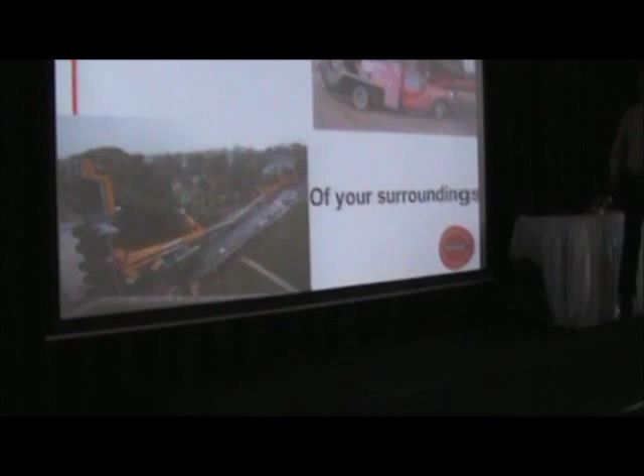Okay, here we go. Can I use - that's hard for me to do because I don't like to stand still. I'm sorry, I had a Pepsi and a half. I'm ready to go sideways.

Okay, we'll try here. Anyways, safety moment. In every presentation we do, we're required by company policy to have a bit of a safety moment. This one is always: be aware of your surroundings. In Canada, in the last month, with mast rigs, whether it's water well, some coring rigs and things like that, we've had 3 strikes with power lines.

Each one of the strikes, when they did the assessment and analysis of the job site, it all came down to one thing only: the people said they didn't see them there. They weren't aware of their surroundings. No one got hurt - one guy got burned bad from an arc, but that's about it. It's one of these things when you're dealing with mast rigs, or even equipment digging a trench - you've got to be aware of what's above you and also below you.

Okay, we've done our safety session, we're good to go now. Okay, for examples of grouting - this is going to kill me to stand in one spot, but here we go. This is just a couple of slides I've pulled out of different presentations I've used across the country, and this one here is examples of poor grouting.

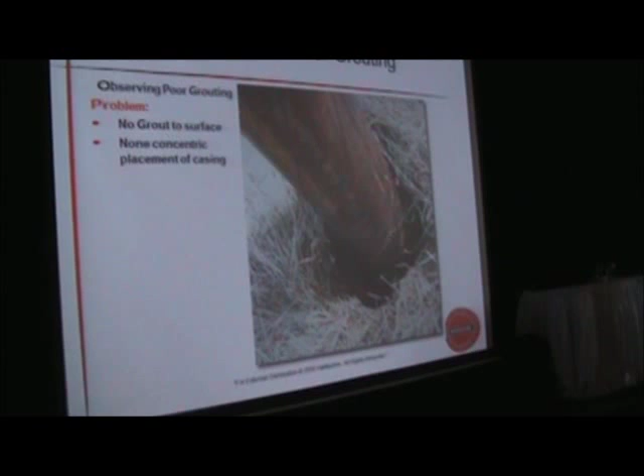The next thing is non-concentric placement of the casing. If you don't have your casing centralized, I don't care how good your pump is, or whether you're pumping cement or bentonite or a combination - you're never going to get a proper seal. If your casing is touching at any point, usually within the top 20 feet, up against the formation somewhere, you're going to have seepage and wind up with contamination into your well.

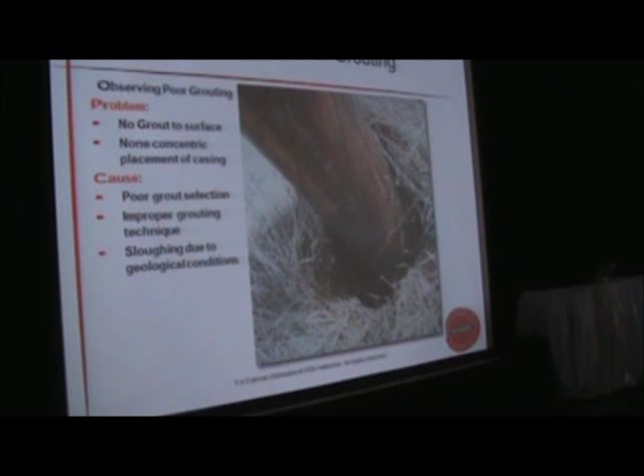The cause of this is poor grout selection, and that's a big part of when this type of situation happens. Improper grouting technique - we're going to cover that a little later on. And sloughing due to geological conditions, putting in the wrong material because of the conditions you're in. We're going to be covering when and where to place certain materials, and the impact - contamination to the aquifer well. Very straightforward.

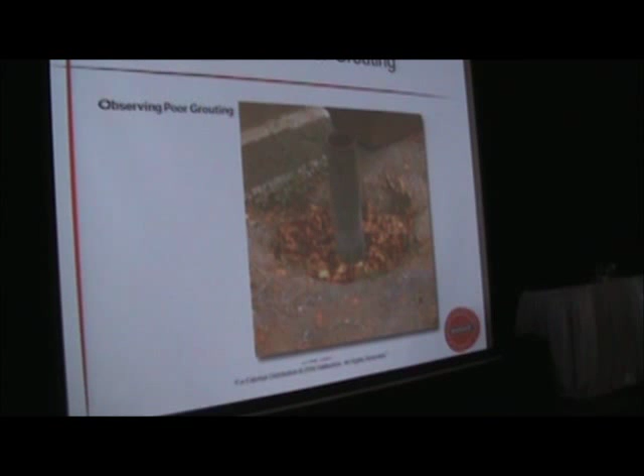Runoff, small animals, insects, so on and so forth - basically you have an issue on your hands for no reason. The next one here is from an older well. The cap was taken off - there was a vermin cap on top, but this was when they were getting ready to do some work on a well, and there was just subsidence around it.

Problem here is poor annular seal. If you get subsidence like that in anything, generically, I don't care what you're grouting with - if you're getting that type of subsidence happening, you didn't have a proper seal when you first put it in. The grout job that you did, for whatever reason, wasn't done properly. Now, when they settle like that, cement settles a bit, that's fine - you gotta top it up. But this happening after a couple of years is due to, at the end of the day, a poor annular seal.

No cap - that one there was put in just to make sure that everyone was staying awake. And then poor grout selection, and improper grouting technique, same deal - you get a lot of pocketing. If you get pocketing in there happening, you will get subsidence happening.

Backfilling - if it was a trench or something, in this case it wasn't a trench, it was actually a grout with tremie line that they did. But if you were digging, say, doing some pitless or something like that, and you didn't backfill properly right around your pitless, you will get subsidence happening. Impact - basically over time what you do is you get a washout and collapse.

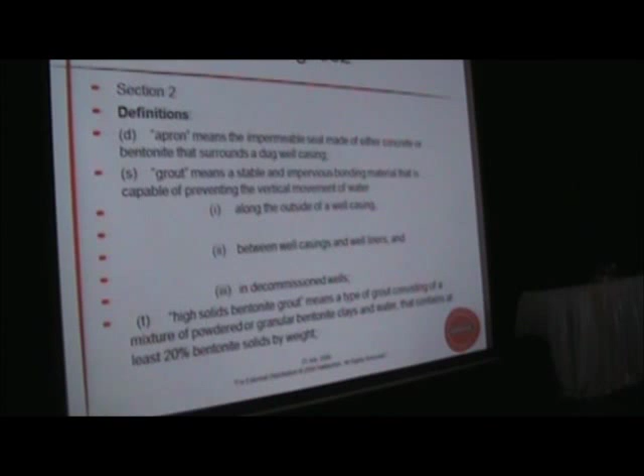Okay, regulation 903, out of the definition section. What I did was pull the pieces that contain the grouting, because that's what we're going to be covering. When you get into dug wells, apron means the impermeable seal made of either concrete or bentonite that surrounds the dug well casing. I'm going to be referring to these, but this is just to get us going.

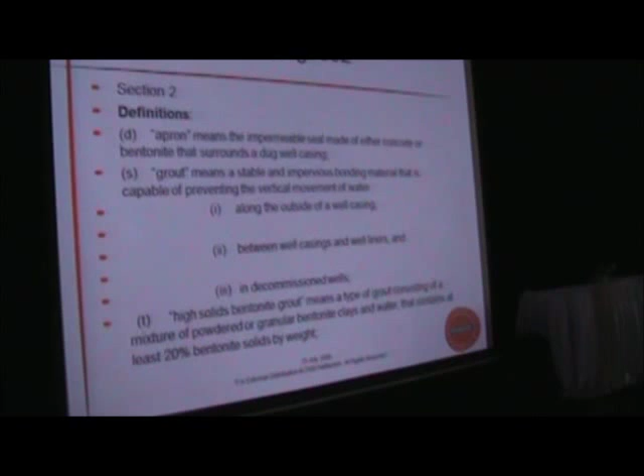Grout, and this is their definition straight out of the regulation - these are the government's words - grout means a stable, impervious bonding material, that's critical, that is capable of preventing vertical movement of water, number one, along the outside of the well casing, between the well casing and well liner, and then when you decommission a well. The last definition that applies on the grouting side, which we're talking about today, is high solid bentonite grout: a type of grout consisting of a mixture of powder or granular bentonite clays - bentonite and clays are the same thing - and water that contains at least 20% bentonite solids by weight.

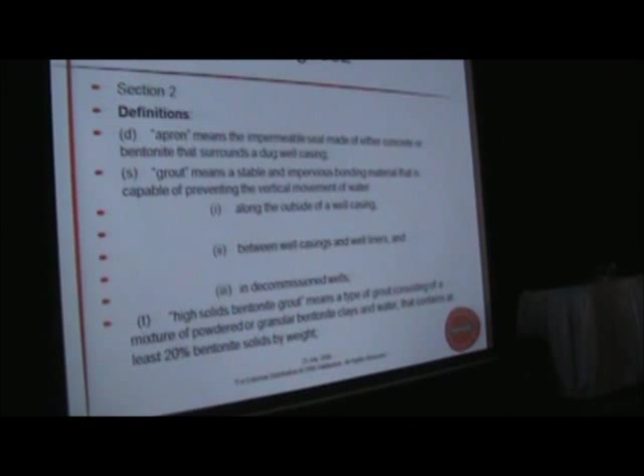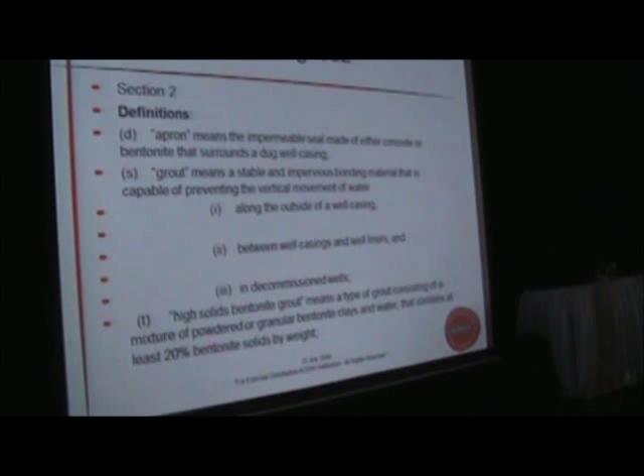The way we check for solids, if someone's coming out for an inspection or there's an issue, is they do density tests by weight, and that's how they figure it out - there's no ifs, ands, or buts. It's a balance we use, or any inspector uses, just a straight mud balance, done by weight. They go by manufacturer spec, and there's a tolerance in there for weight, depending on what product you're using, and that's how they figure out whether you're light or on spec.

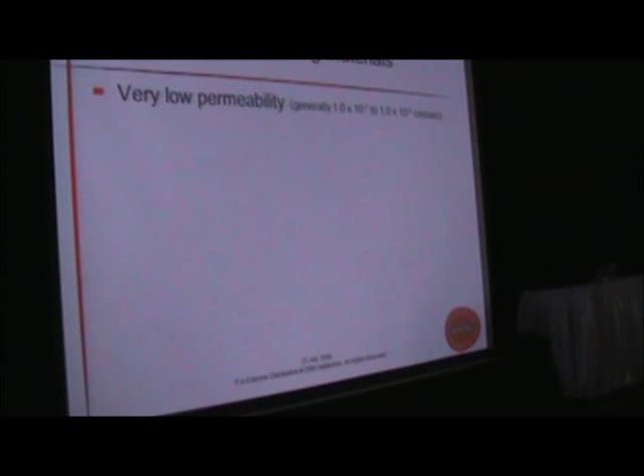Okay, suitable sealing materials have low permeability, generally around 10 to the negative 7 to 10 to the negative 9 centimeters per second. That's the movement or infiltration of outside contaminants inwards towards the casing - that's where your seal is. That's very, very slow - extremely slow, years and years and years to get any movement.

Capable - and this is very critical, this is the part that a lot of people overlook. They just say, well, I got it in the hole, it's going to happen. Capable of bonding with the casing and the borehole, forming a permanent watertight seal. That's it - that's what a true grout is, and I don't care what kind it is or what manufacturer, that is what a grout is anywhere in the world. That is what a grout has to do for you in order to do the job properly.

Uniformly distributed around the casing to facilitate an effective seal.

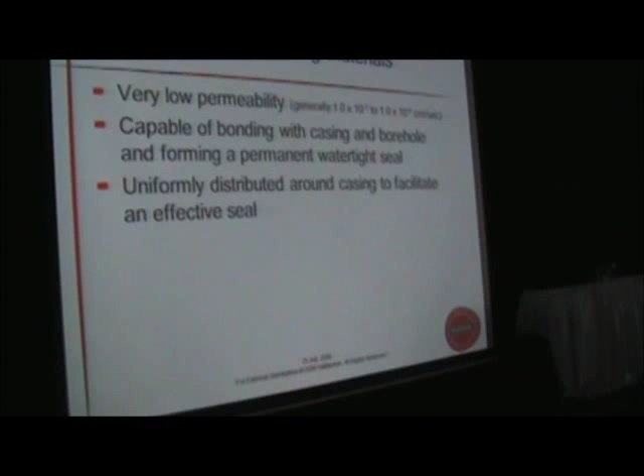Under the regulation here, and this is where I'll repeat some important things: grout is required to be a minimum of 20% solid. So if you're cutting it back with your cement or whatever so you can pump it, you're actually below the regulation spec.

On materials, that 20% is the standard, though there are grouts designed down to 16%. But that would be more of a temporary seal, something you're grouting and planning to clean out later, like for a week or two, before coming back in to do it properly around 16%.

Everything else is 20% or above. Wells that are specifically engineered or designed are anywhere from 30 to 80% solid. Those are specific jobs where you're dealing with contaminants or commingling aquifers that they definitely want kept separated.

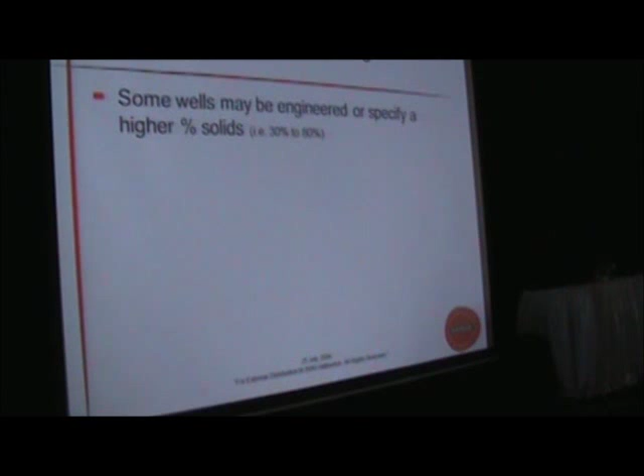That's where you get to the 30 and 80%. These designs are based on the scenario and standard of the particular job, the soil formation, and the degree of permeability. The higher the solids, the slower the ability of the outside zones to migrate.

30% is typically used for a monitoring well or municipal well. Most municipal wells, if it's for a large system, require a minimum of 30% solid. That's still a pumpable grout, but it's a lot heavier - a big difference when you start to pump.

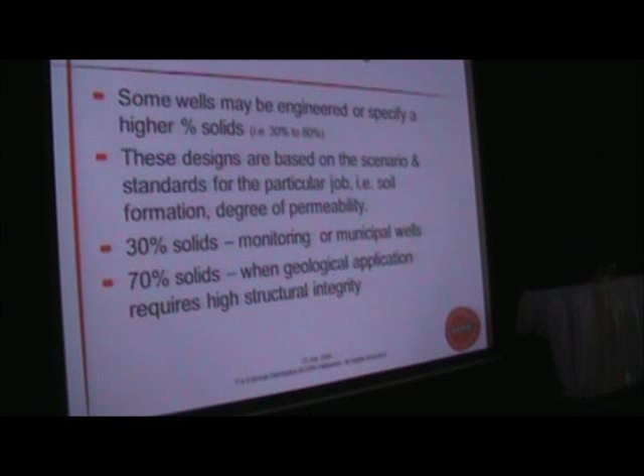70% and up is for geological applications requiring high structural integrity. Bentonite doesn't have structural supporting strength like cement, but it will hold and seal. The higher the solids content, the more structural integrity, or the stronger it's going to be in supporting load.

Now I've divided the presentation into two sections. The first is drilling and construction of drilled wells, and the second part is on dug wells. For the first part, section 21, I'll go through these quickly as an overview, then get into where the grouting comes into play.

Well casing, this is section 21.1, going through it quickly. A well casing must be installed in each drilled well, and it must meet certain requirements. The well casing must be at least 6.1 meters - for old-fashioned people like me, that's around 20 feet - and it must extend at least 152 millimeters above ground.

So you've got to have your stick-up at least 6 inches. There's a minimum annular space of 1 inch outside the well casing, between the well casing and liners of different diameters. They want the 1 inch because with that you can at least get in there and grout - it'll be tight, but you can still get a tremie line down there.

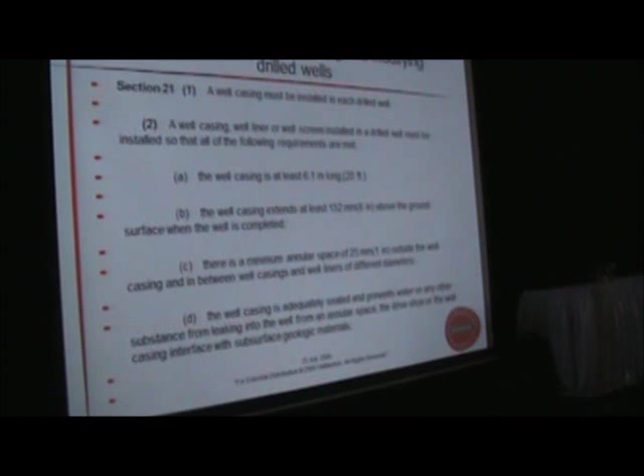A well casing must be adequately sealed and prevent water or any other substance from leaking into the well from an annular space, the drive shoe, or the well casing interface with subsurface geological material.

For steel casing, a drive shoe is to be attached to the bottom. That's one thing - this is one of the few provinces that stipulates drive shoes have to be on the bottom of the steel casing, and that was something I found interesting about your regulation.

Except when using remediation for a well, under clause G, a seal of high solids bentonite grout or other grout must extend upwards in the annular space to at least 1 meter above the base of the casing and seal the annular space. That's what you have to do.

For a well liner installed to repair or modify an existing well for water contamination, a seal of high solids bentonite or other grout must extend upwards in the annular space from the base of the well liner to as near to the surface as possible.

One thing when using bentonite - if you want it to remain active and do its job, it cannot be exposed to sunlight for a long period. It dries out, like a cornfield. When it dries right out and then it rains, it heals itself up. That's what bentonite does - it'll start to crack, and then when the moisture comes back in, it seals again.

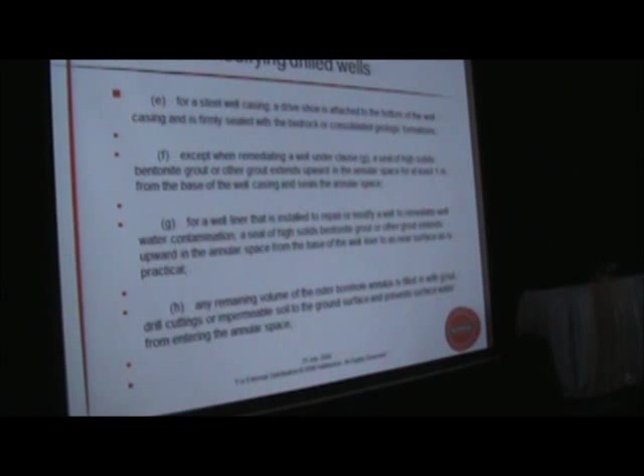So if you're ever going to run bentonite to surface, you always want to put 3 to 4 inches of soil over top of that bentonite. That will be enough of a seal to keep it from drying out, splitting, and getting any micro fractures in there, okay?

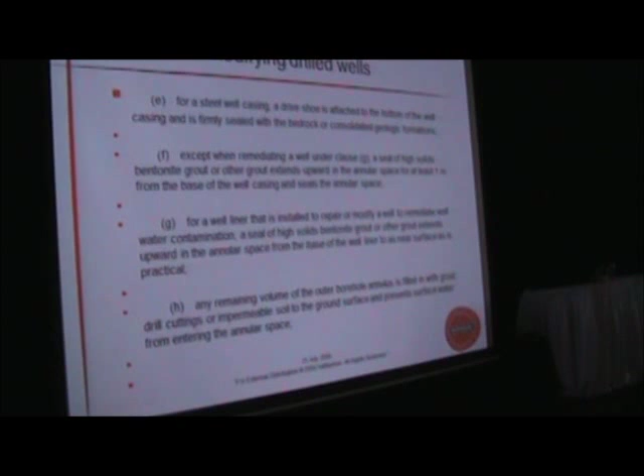Any remaining volume of the outer borehole annulus is filled in with grout, drill cuttings, or impermeable soil to the ground surface to prevent surface water from entering the annular space. In other words, mound it up on top. You're allowed to mound it using drill cuttings or soil or whatever over top of your grout.

A well casing is welded or otherwise connected to the well screen used. Any natural or manufactured filter pack material used in conjunction with the well screen developed after installation must be material suitable for potable water applications.

Question to you guys up there: how thick of a filter pack can you put on the outside of a screen that you can clean at any time? How thick? 7, 8 foot? What is the maximum that you can actually surge and swab and clean a filter pack?

This isn't a trick question. The answer is anything over 7 inches for a filter pack - if you're going to be cleaning, have to go back into the well years later because it's starting to plug off, you want to surge and swab. Once you're over the 7-inch spacing on the outside of that screen, into the formation, you will not be able to get your chemicals past the 7-inch mark. At 7.5 inches, I don't care how much horsepower you put down there, unless you destroy the screen and blow out the filter pack, you won't be able to clean any deeper than 7 inches.

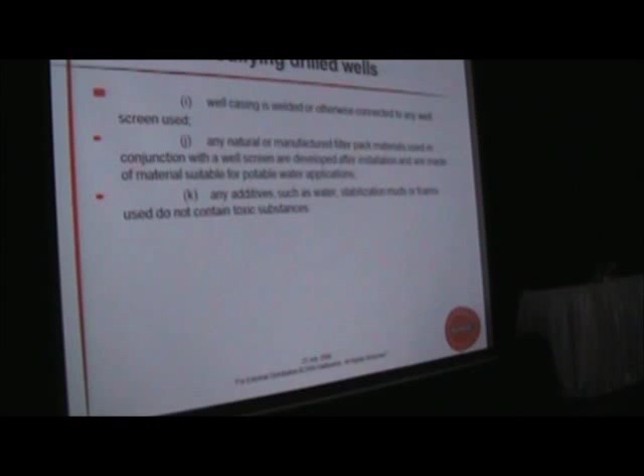They've tried it - used horsepower, used air and everything else - to get the chemicals back if you have an acid situation, some slime happening down there, or contaminants building up over time. A 7-inch filter pack is about the maximum you can thoroughly clean and do a proper job of it all.

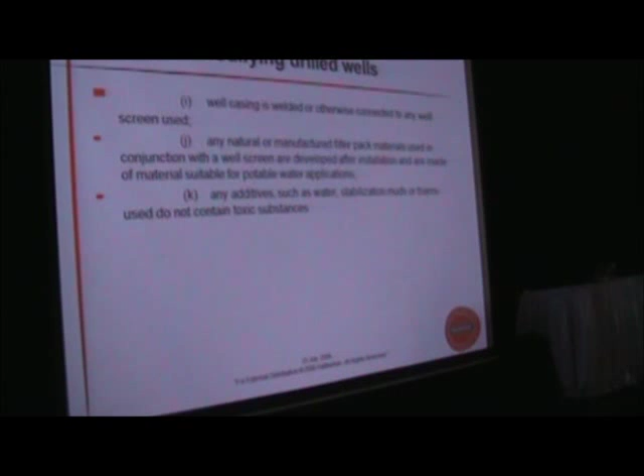Any additives such as water stabilization muds or foam used must not contain a toxic substance. I'm going to cover the environmental side of this at the very end, but right now, if you're in the water well industry, anything you use that's part of the reg has to be NSF. I'm going to explain that with a couple slides on NSF, what it's all about, so everyone understands what to say and what not to say - in a lot of cases people misinterpret what NSF stands for.

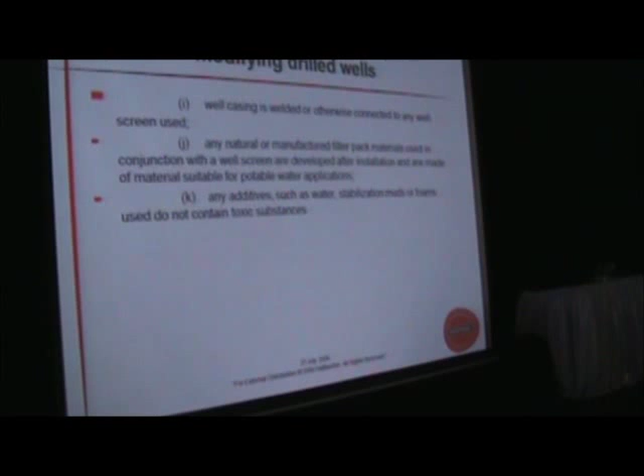For a drilled well, the main thing they discuss is bentonites, and I'm just going to cover bentonites here. Cements I'm going to cover on the side when we do the dug wells.

Advantages and disadvantages of bentonite - this is 20% slurry minimum, and it's a minimum I'm putting in there. It expands up to 8 times its dry volume when exposed to water, with expansion force into the open annulus spaces in an annulus.

Basically, the difference between bentonite and cement in how they set up is this: when bentonite sets up, it absorbs water - it's a sponge, it's clay soaking up water, that's why it swells up. When cement sets, cement displaces water. That's the difference between the two products. That's why you can get a little bit of shrinking or subsidence when putting in cement - whether it's out of a bag or from a plant, cement displaces water, that's how it sets. Bentonite absorbs water. Two different reactions that happen down the hole.

Bentonites have a faster setting time than cement - that's true to a point, because you can set up cement very quickly, within 3 to 4 minutes if you want, using chemicals. It's pretty easy to do, I've done it, and I wouldn't do it again, because once you start playing with that, cement is all about chemistry in its formulations - that's when you're getting into doing anything with cement.

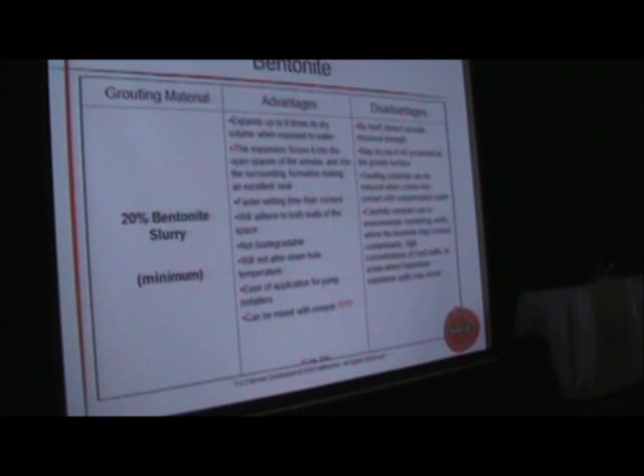If you want to put a cement cap on, cement is calcium-based, bentonite is sodium-based, they don't get along that well. So what you have to do is put a layer of sand. If you're going to cap a well with cement after you've grouted it up, you should put about 1 inch of sand between the cement and the bentonite. The cement will move down and migrate, the bentonite will come up, but as long as the two surfaces aren't directly in contact, you'll have a constant seal. They'll bond, the cement with the sand and the bentonite with the sand, acting as a buffer between the two, and you'll still get a proper seal.

A big thing with bentonite, and this shouldn't apply to any water well unless you're decommissioning because the well is contaminated, is that you have to be conscious of contaminants in the water, like with decommissioning a bad well. The type of water or contaminants in the formations can, in some places, retard the bentonite from setting up.

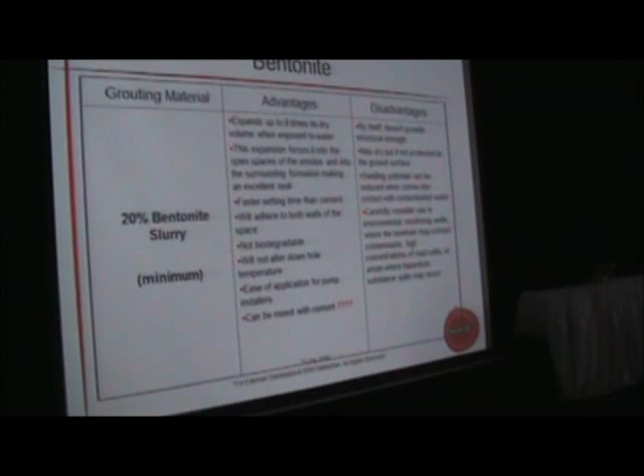Carefully, this goes into the same thing: if you're installing a well in springtime on a busy roadway where they're spraying calcium chloride and spreading a lot of salt, I'll be honest with you, the top portion is not the spot you want to have bentonite, because calcium chloride and high chloride salts do not get along with bentonite. They degrade them, break them down.

They come in several different forms: powder, granular, chips, pellets. There are two types of pumpable grouts, and a dispersed bentonite grout is one of those grouts that have various additives put in them. They grind the bentonite up to a certain size, and as it's going down the conveyor into the dryer to dry it to the right percent moisture, they spray retarders on it to slow its ability to hydrate. These are called one-step grouts, and the ones we have are Quik-Grout and AquaGuard. You just take the bag and put it in the water.

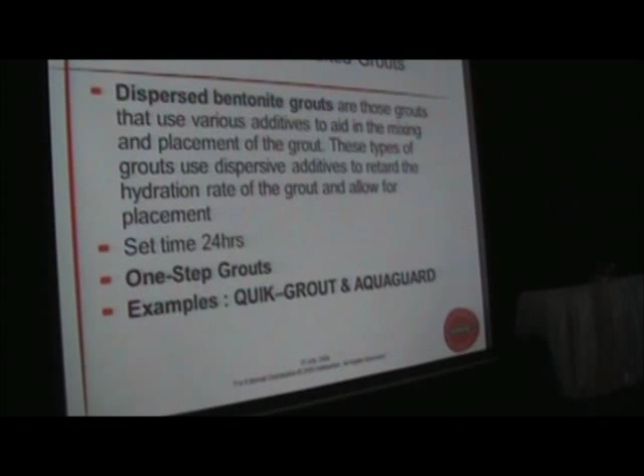There's retarders sprayed and dried onto each pellet or granular, so when it hits the water, it has to be washed off by the paddles as it's moving around in your mixer, and then when it starts to wash off, it starts to hydrate. For it to truly set up, the setting time for a 100% set is around 24 hours. The working time, where it starts to go into its set stage, is anywhere from 5 to 7 minutes from when it's introduced to the water. So when you're grouting, all grouts are about 7 to 9 minutes, depending on their formulation's setters, but the 24 hours is for a true set, where it's good to go, and that's the end of the ballgame.

Inhibited grouts or dispersed grouts - this is a two-stage system. You'll have your water, treat your water, then put in a polymer base, something like a liquid polymer, as your inhibitor. You're actually doing it yourself mechanically. Then after that, you put in raw bentonite, unbeneficiated, meaning absolutely zero additives. It's ground to a certain size, typically 80 mesh, and you pour it in there next. When the two get mixed around, the polymers stick to the bentonite, slowing its hydration rate, and then you pump her down the hole.

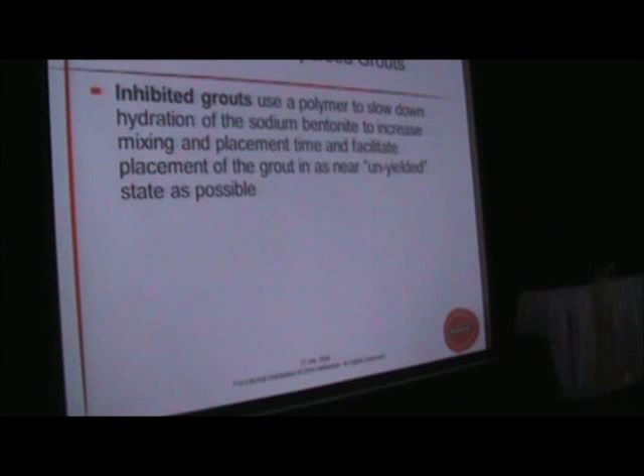That one there, the set time, because you're mechanically doing it, you're actually washing, you're installing the polymer onto it in the process. It doesn't get a long time to bond with the bentonites, so they set up a lot quicker. These ones still have a working time of about 7 to 9, 8, 9 minutes, around there, same as a one-step grout. The big thing is that their set times are quicker.

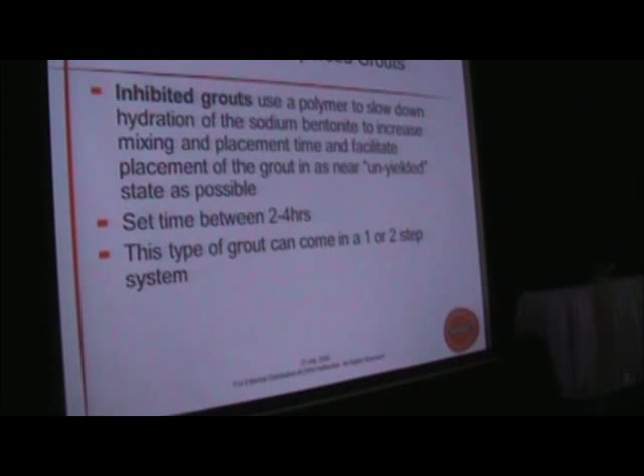What helps suspend your sand when you're doing a geothermal grout? Okay, when you're doing any type of grout for geothermal, when you put your bentonite in there, the bentonite is only a carrier. The sands are what are there for the conductivity. And when the sand is introduced, the bentonite's job is just there to do the suspension. And it has a bit of a retarder put on there. So what it's going to do, once the bentonite is hydrated or whatever, is it starts to lock itself into formation, and that's how it pulls all the sand up.

So it has a retarder on your other ones? Oh yes, it's always something you want. If you're going to use a grout that is designed for geothermal, you're going to be adding solids, sand, your silica sand. If you're not going to be adding any silica sand to something for a geothermal system, you want to use just a standard grout.

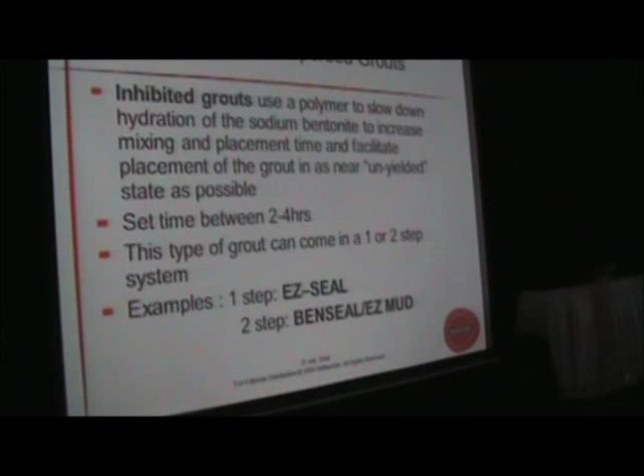And that's your 3 choices out there for any type of grouting. Please do not use a geothermal grout for grouting water wells. Remember, you don't have your 20% solids when you're doing that, because it's very light grout. It's a suspender.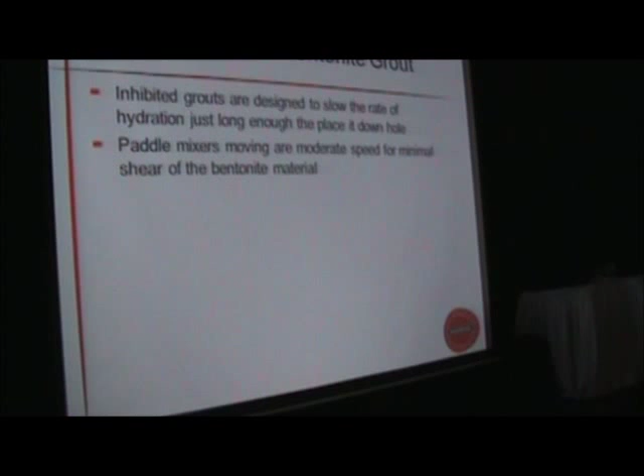Working with bentonite grouts, inhibited grouts are designed to slow the rate of hydration, just long enough to place down hole. Paddle mixers, guys, you've got to have paddle mixers when you're doing these. A shovel will work, I guess, if you want to do it that way, but you can't use any other pump to mix other than paddle mixers. The more abrasive the pump, the faster your grout is going to start setting up in your tank. You cut your work time down.

Best way to determine your percent solids or density with these types of grouts is to accurately measure the amount of water for each batch. That's it. That's the 101. If it says 24 gallons, US gallons or whatever, or X number of liters, that's what each batch has to be. It can't be, well, we'll put this, yeah, that's about right. You mark it on your tank or whatever you're mixing in, and that's your fill line every time.

Simple as that. You do it once, mark it, you're good every time you're going to grout. But if you're doing the guess game, you're going to wind up plugging tremmy lines, you're going to be inconsistent in your grout, and you can get sloughing happening, sediment. Because if you put a heavy batch, light batch, or whatever, it's not consistent, your grout is not going to set up all the same, and you're going to wind up having subsidence happen.

Okay, take time to calculate the correct volume, and we'll cover that really quick down the road here. Calculating correct volumes - plug and pellets, approximately 70% solids. These are one of the easiest things. Typical bag, a 50-pound bag, is 0.7 cubic feet.

When you're dealing with pellets, it's a finely ground bentonite, and they use these in environmental quite a bit. All it is, is a 200 mesh ground through, and they're put through plug screens, basically through a press, and that's how a plug is made. Then they're cut to length. Uncoated is just the ground up material put through the screen with a binder to hold it together.

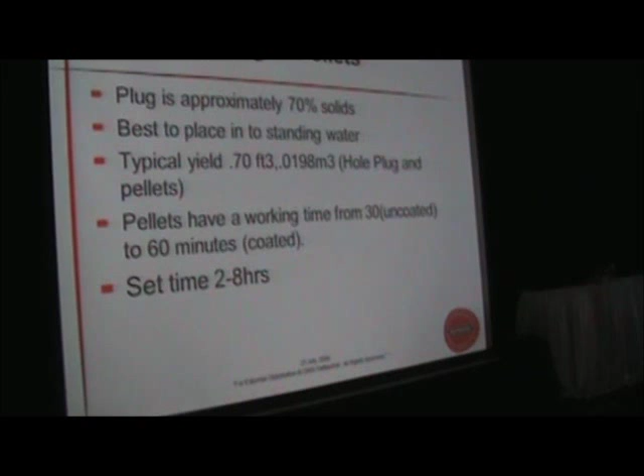On a drilled well, it's bentonite. That's the only thing in that whole section, section 21 I believe it is, where it says bentonite, bentonite, bentonite. It does not mention cement whatsoever. The regulation is right up here. It's what I was told with regulations, because I deal with each province - it's all up to the interpretation of the user.

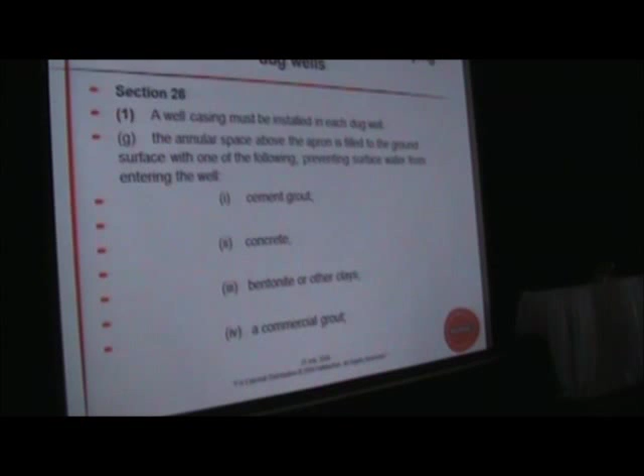The annular space above the apron is filled to the ground surface with one of the following to prevent surface water from entering: cement grout, concrete, bentonite or other clays, or commercial grout. Simple as that, that's what it is. On the other side, piping connection excavations are filled with one of the following, and they list the same thing: cement grout, concrete, bentonite or other clays, and commercial grout.

Any additives used, such as water stabilization muds or foams, do not contain any toxic substance. This is where, in the definition section, this comes in. It's critical that if you're using anything in the water well industry - and at the very last part I cover this - you gotta make sure, and I know everyone does here, but I can't specify enough, that it falls in compliance on the environmental side. I've had a couple issues in the far north where they ran out of stuff and they decided to improvise.

And the wells they were doing, we had to cement them off. They were classified as contaminant before we even got them online, just because of the products they use. So I can't say enough, if it's not within the realm of drilling products out there and certified products, don't use it.

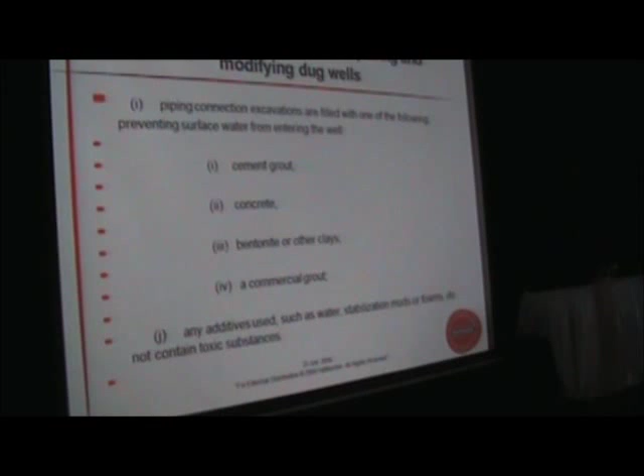Okay, on this side we talked about bentonites, and on this side here we're going to cover the cement side of it. The cement has a greater density than bentonite. It is easier to place. Cement will flow anywhere for you. If you want to modify it by adding something into it, whatever you can. It has structural strength, and it resists many common contaminants.

The one thing with cement is you can fool with set times or whatever, but I don't care what additives and how fast you have your cement setting, cements should be allowed to set a minimum of 12 hours before you do any work on or around it. Because at 12 hours, a cement is not fully cured, but it has enough structural integrity and bonding already happening chemically that it will hold together. You're not going to create any damage. The longer you leave it set, the better off you are.

When setting, heat is generated, this is critical, I actually had several disasters in this area. Heat, which expands metal casings, may cause seepage over time. The faster a cement sets, the more heat it generates. And that is why if you're doing a lot of stuff, especially around PVC, and it's in the next couple slides, what you want to do is put a retarder in the cement.

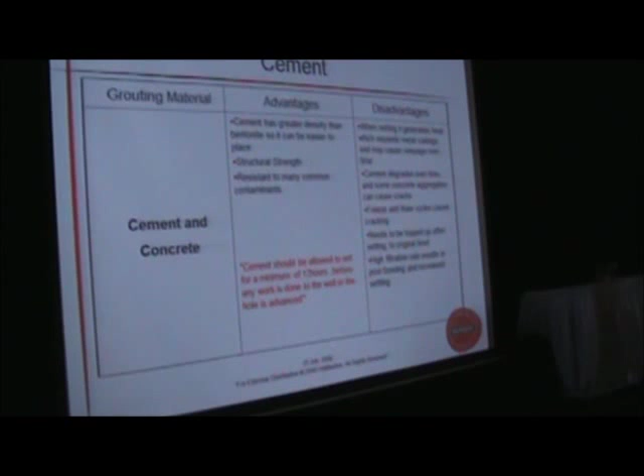Cement degrades over time, and some concrete aggregates that they add in there can cause cracking. Freezing and thaw cycles with cement, typically towards the surface, if they get any type of a crack in them, you can have some issues. Needs to be topped up. And remember when I said cement sets, cement shrinks. It doesn't really shrink, sorry, it displaces water. When it displaces water, it's losing volume. That is why you have to go back and usually top them up.

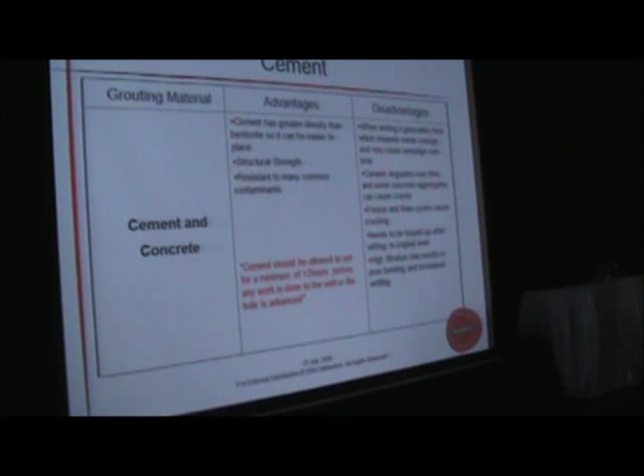High filtration rate results in poor bonding and increases in settling. Filtration rate is the speed at which the water leaves the cement when it's in the set stage. You can play with that. It's not too hard to play with, but that's one of those things you have to be aware of.

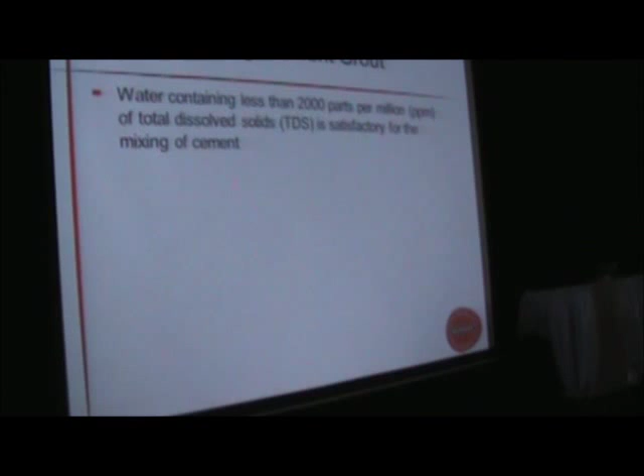Mixing cement, one thing is you got less than 2,000 ppm of total dissolved solids. In other words, if the water's pretty reasonable, you can get away with it. One thing that will offset cement is if there's any type of residue from a hydrocarbon, even a trace hydrocarbon around, some grease or something like that gets in there, that will mess up the batch of cement. High pH, if you're pulling from a treated system or whatever and it's got high pH, what it'll do is it speeds up the setting time of cement.

It's very rare, but sometimes at some of these municipal places that people pull off of, filling up water trucks or whatever, then out to a job site—if it's a brand new subdivision or house being built in the middle of nowhere with no water around, they take their own water in or fill up on the way. Sometimes these newer systems out there are treating the water a bit and the pH is up, and guys have issues setting up the cement when they use it.

No cement is any good in any situation if you have lumps in it, because the lumps are dry inside. If everything sets up with a big wad in there, inside that lump is air—there's pocketing, and then you're going to have issues down the road.

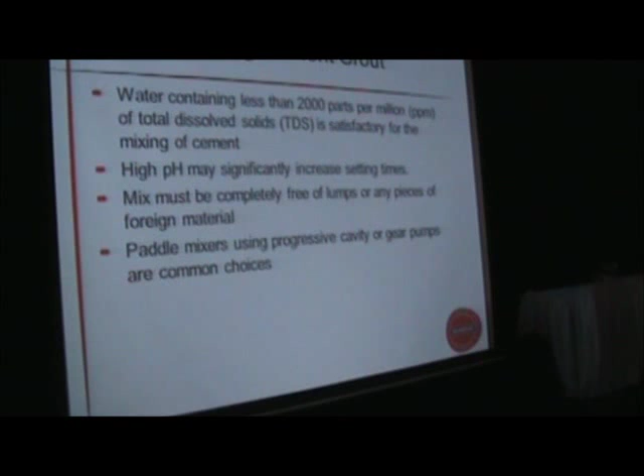Paddle mixers using progressive cavity pumps or gear pumps are most common for placement. Piston or diaphragm pumps can actually be used for mixing cement—you can get away with that. A progressive cavity or gear pump, no. Those have wear, the stators get worn very quickly when you're pumping cement, and they have limited ability to develop enough pressure to move long distances, whereas a piston or diaphragm sucks into the chamber, pushes out, and away she goes.

Microannulus—if you're mudding up or even using heavy foams and you're going to cement right afterwards, try to make sure you get that out, blow the hole or flush it before you start the grout. Because if the bentonite gets in there along the formation, the cement will not move through a filter cake, and over time that filter cake or bentonite seal—the wall you created when you drilled that hole—will start to break down and you create your own microannulus.

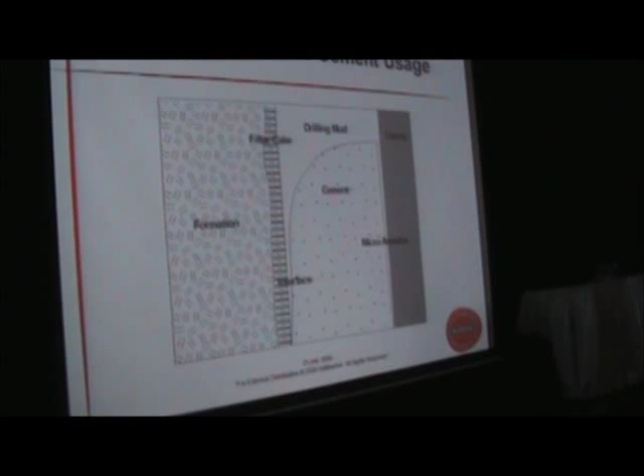Also, you've got to be conscious of the casings. Steel—added heat expands the casing, dissipated heat causes the casing to contract. Over time, when you start your grouting, as long as things set and everything happens in a very slow cycle, you're not going to have issues with the bonding. But if it flash sets, or you're playing with the setters, that's when you're going to wind up having real issues with microannulus.

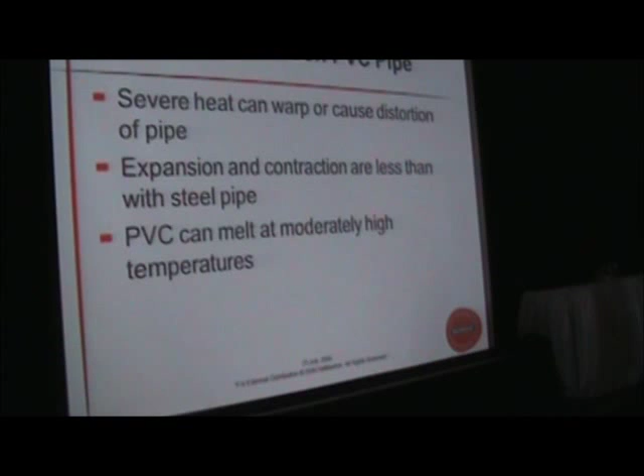PVC—warp distorts the pipe. I personally will not go on the job anymore; I've learned my lesson that if you're using PVC pipe and they want cement, I don't want any part of it. A lot of the time guys are mixing their own cement, and even when it's the right number of batches, I've almost always had issues with the cement expanding—getting some warping or issues with the seals where they join together if you're putting PVC in sections.

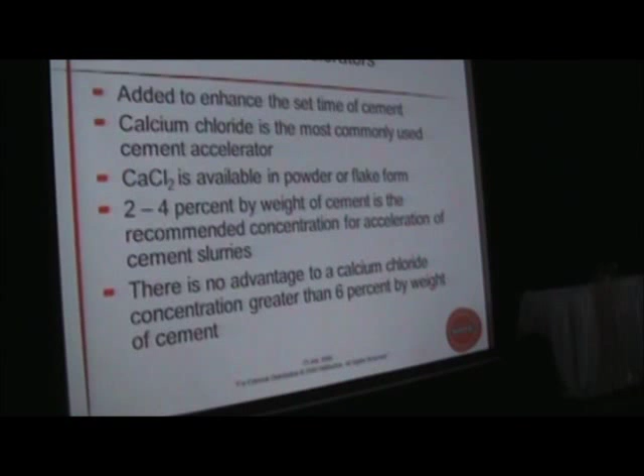Cement accelerators all do is speed up the set time of cement. Calcium chloride is the most common, in powder or flake form. 2 to 4% by weight of cement is the recommended concentration for an accelerated cement slurry. If you're going to add calcium chloride, it's 2 to 4% by weight—there's no advantage to adding more. Guys figure they'll put a little extra, up to 6%. Once you've exceeded 6%, you might as well just call it a day and start another well, because the cement will either set up on you before it comes down the chute or off the end of the wheelbarrow, or you'll get so much heating along your casing that you're going to have a microannulus. Either way, you're painting yourself into a corner.

Standard, if you're using a sack of cement, it's 0.8 to 1.6 kg, or about 1.8 to 3.5 pounds per sack of cement—that's an 88-pound sack of cement. Accelerators with cement at low temperatures are very unpredictable, because cement is a chemical reaction. If the temperature is really cold out and you use cement with an accelerator, the combination of the two just turns your cement sideways—you're not going to have a proper set, or nine times out of ten, you're not going to have proper mixing.

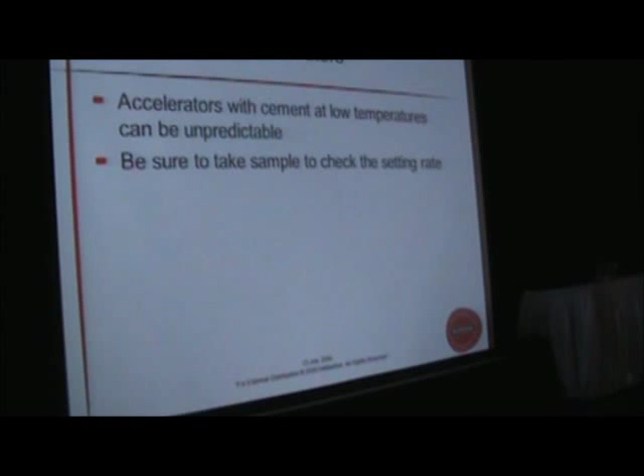I always tell people, if you're doing the cement side of it, especially with any volumes, when you pour your first batch, take a sample and set it aside, noting the time you started your cement. Then you'll know very quickly how well it's setting up.

If you use too much calcium chloride, once you get around 6% concentration, it can cause corrosion problems. You want to stay between 2% and 4% calcium chloride by weight in cement.

It's been proven over the years that if there's any marks, scoring, or scratches on the steel where the outside coating, we'll call it paint, is removed and steel is exposed, you'll get corrosion.

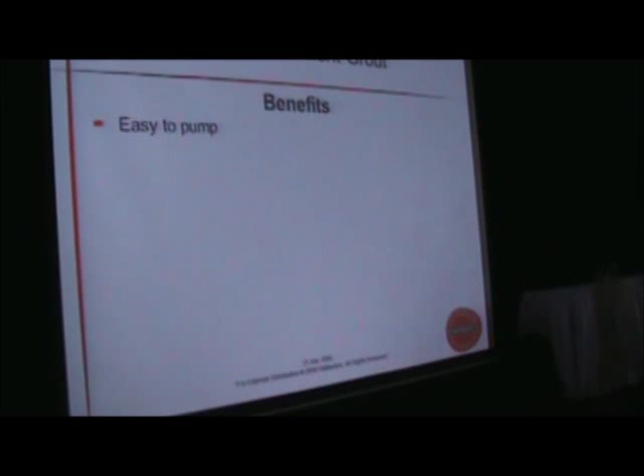The big thing is just follow your manufacturer's spec. Now, bentonite cement, this is my pet peeve, but I've got to put it in to be fair to the whole deal. Bentonite and cement grouts are easy to pump and easy to clean up afterwards, they're Cadillac to clean up. Bentonite can be used in concentrations up to 5% by weight.

Anyone that's put bentonite in with their cement thinking it's going to do something, I'll explain what it doesn't do. Once you've exceeded 5% by weight, you basically have garbage down the hole, because cement is a calcium based material and bentonite is a sodium base. They don't get along.

The only reason bentonite was ever introduced to cement, and I know you guys do deep wells around here, but I don't know anyone pumping cement 15, 20,000 feet. When you add bentonite to cement, it acts as a lubricant. That's from the oil patch, that's where that comes from.

For what you're doing in the water well industry, yes, you can do it. But unless you're pumping anything over about 12,000 feet, there's no reason in this world that you need to be adding any bentonite. That comes from the oil field, it was adopted from the oil field, and realistically it doesn't do you any good.

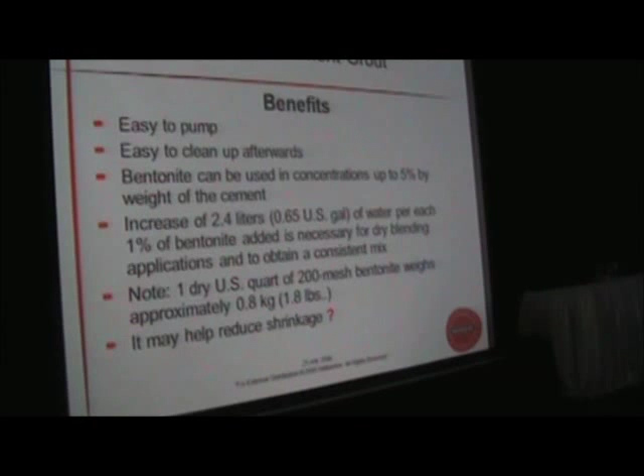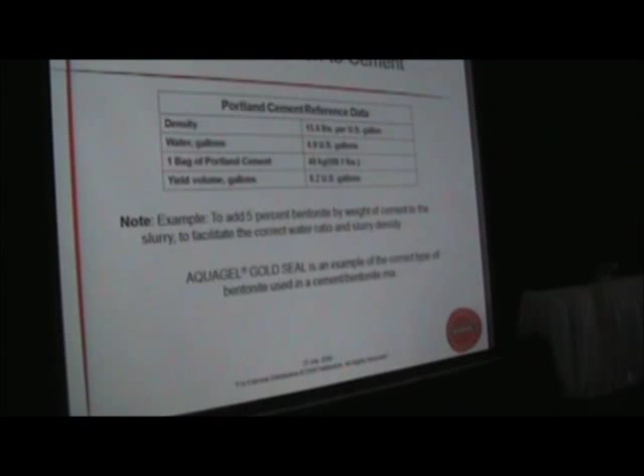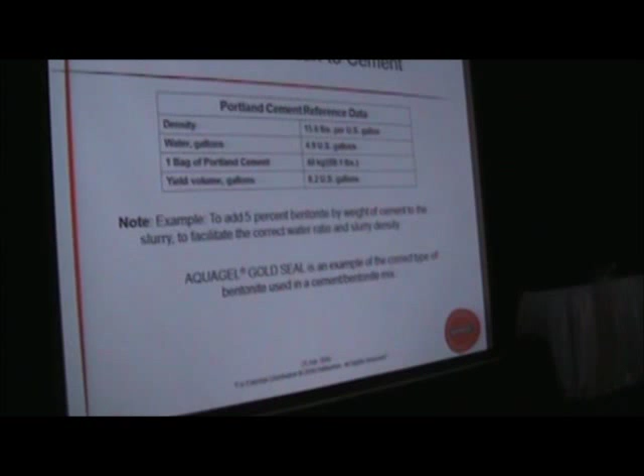The only thing I want to point out is if you're going to be adding a bentonite to cement, please remember this: you have to use, and this is a big word but it's very simple, an unbeneficiated bentonite. That means a bentonite with zero additives. It's the bentonite from the mine, dry, ground, sized, and bagged. There's absolutely nothing, no additives to it. Ours is called Gold Seal, but there are other manufacturers that have intended to use something with no additives.

Remember, bentonites have additives put to them. Mostly they're polymers or extenders put in there to change their structure or the way they behave when they hit the water. Those polymers tend to turn bentonites wonky, cements wonky. They can turn them into pudding if there's too much polymer in the actual bentonite you're adding to it.

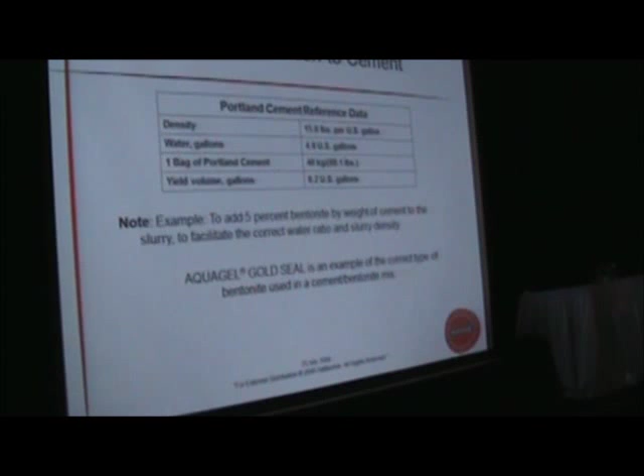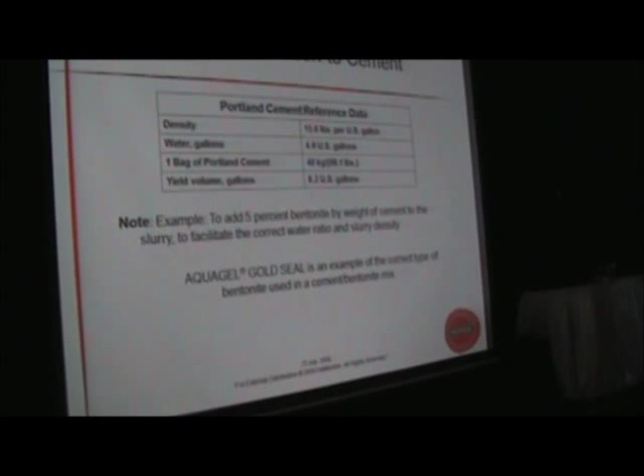If you add weights, if you're not measuring how much bentonite you're putting in and just throwing it in your bucket with your cement, which I see quite often, what you'll wind up doing is that certain types of bentonites, because of the polymer coating on there, will turn the cement into more like a bubble gum down below. They'll set on the surface where they can get rid of the water, but anything in a contained spot, they tend to set like a bubble gum. They really don't go into a set. It takes about 2 to 3 weeks to get them set up after that.

This gives you a rough idea. You've got 0.65 US gallons fresh water for every percent bentonite added. If you want 5% bentonite, it'd be 5 times 0.65, so you'd have to add...

3 and a quarter US gallons. The reason everything, just so this was brought up, asked earlier, why on the bags we have the metric, and why is everything in US? Because that's where it's manufactured. That's where the best deposits in the world, which are in Wyoming, are, and they always base everything, oil patch, doesn't matter where you go in the world, on US gallons per barrel. That's why that is.

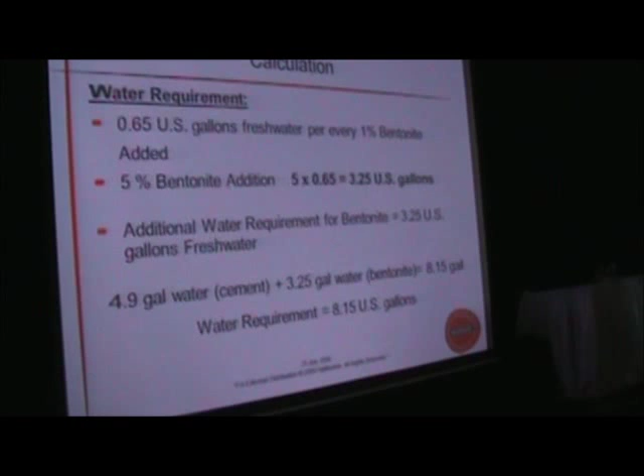What it is, you've got your bentonite. The additional water required for bentonite, for 5% bentonite by weight, is 3 and a quarter gallons. You'd have your cement at 4.9. You add those two together, you need a total of 8.15 US gallons of water for cement at 5%, or cement with 5% bentonite added to it. That's on your slide, so you don't have to memorize it, but it just gives you an idea of what you have to add in order to make this thing work.

Hole volumes, pretty straightforward in this situation. All it is, you take the diameter of your hole and you square it. So if it's a 10-inch hole, it's 10 by 10. 10 times 10 is 100. I always round up in the field, if you've got your calculator handy you can do it. So it's 10 times 10 is 100, divided by 25 is 4. So it's 4 gallons per foot of material or fluids or whatever to fill that extra space.

If you have a pipe or a casing in there, all you do is take your casing size, multiply the two numbers, subtract them out, and that'll give you your volume of what you're going to need for your unit.

Okay, we'll go through this. That's another way of calculating it out. Just take your diameter squared, the easiest way. These slides are in your presentation, or in the handout, but what it is, is just a conversion.

1 cubic meter is 1,000 liters, 1 cubic yard is 27 cubic feet. If you're going from a liquid, you've done your hole volume calculation, okay, and it's a 10-inch hole, you want to fill it up with dry material. What you do is divide, you have 4 gallons, right? Well, 1 cubic foot is 7.48 gallons. It's pretty easy to do your math on these things, to figure out how much dry material you're going to need.

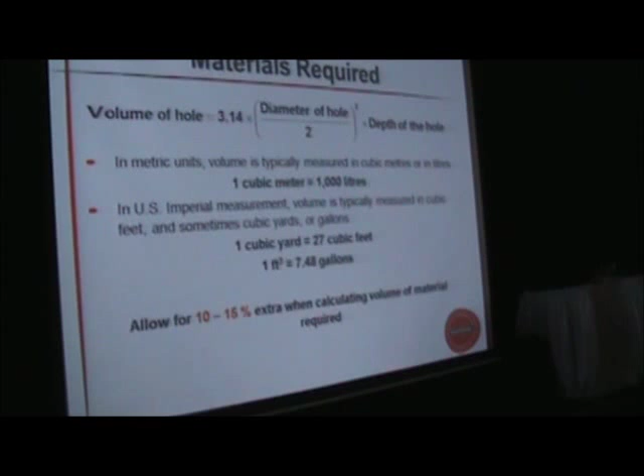Okay, this slide's pretty well redundant, but it gives you an idea how everything calculates out. On the back of manufacturer's bags, or they have these all over the place, if you want to figure out hole volumes and things like that, there's always a chart.

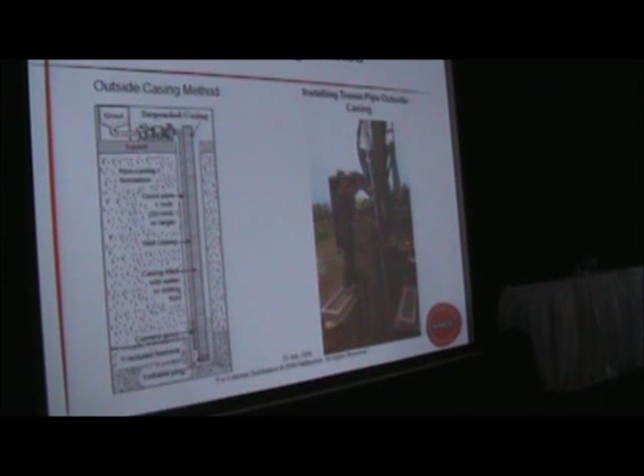And the annulus has to be done, where you run your tremie line down the outside of the casing, and you wind up, because they say you've got to seat the shoe into the formation. So that's your seal, a competent seal, and then what you do is grout from the bottom up.

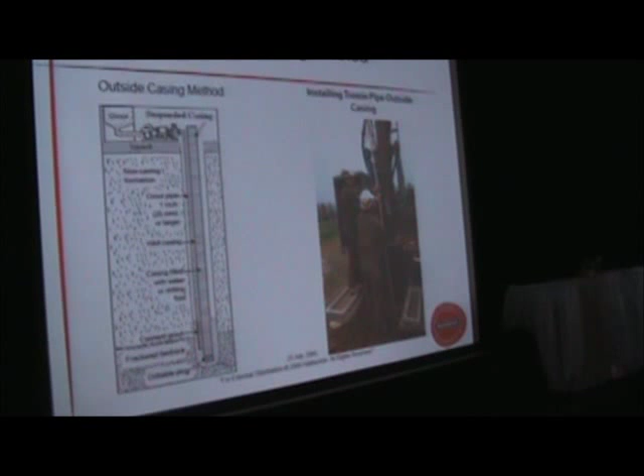Always remember, if you're doing a pumpable grout or even cement, if you're tremieing and doing an outside grout job, try to leave your tremie line buried at least 5 to 10 feet. Cement, I leave it 5, grout I'll leave it 10 feet. But what it is, you've got to purge the hole. So any garbage upside on the formation or anything in that hole, you want to make sure you lift and bring to surface. That is critical. Cement or bentonite, it doesn't matter, you've got to bury that tremie line.

Keep that tremie buried. If you yard her up and shove her back down, especially with bentonite, if you're running a heavy bentonite or having issues with it setting up quick on you, what you'll get is pocketing of air. When you shove it back down, you'll have air entrapment, and if it's midway in there, you'll never get it out. You'll never purge the hole enough or get enough rolling in the bentonite to get all the air pockets out.

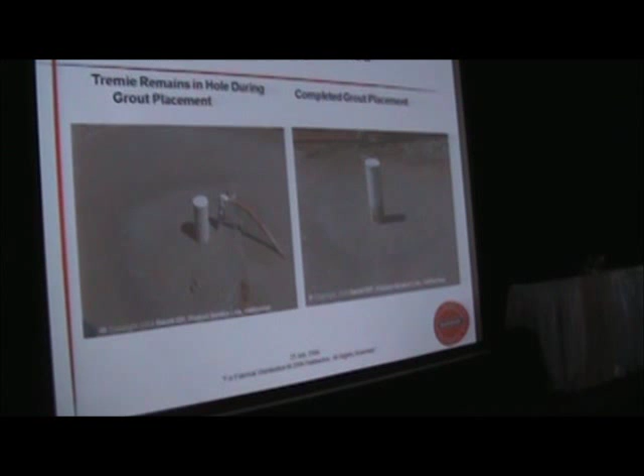This is what you want to see: whatever's in your hopper, whether it's cement or bentonite, has to be what you see coming to surface. When you see it watery, it just drives me sideways, I could walk on water when I see it. Is everything going good on the grouting? Everything Cadillac? The first time they see some dirty gray water come to surface, shut her down. We filled the hole. You've got to purge it right to the top, because if you don't, that's when you're going to have subsidence happening, and you actually haven't done a proper grout job at that point. It should be the same consistency that's in your tank, and away you go.

Okay, hole plug. They do mention using some plug in there, and this is a way you can do it. You have to be patient when you're using hole plug, because if you're not careful, you'll get bridging. I don't care, if you're in a hurry, don't even bother grabbing the hole plug. Even when you're using pellets, which are smaller, they will sink. They're really good for long distances.

Do not start doing this type of dry installation, dry materials like plug or pellets, in any borehole to seal it up if you haven't got time to do it. Because if you get in a hurry, you're going to wind up bridging off, and once you bridge off, you're done. It's a bad day.

Anyways, the best way, and guys are starting to catch on to this out west. It took a while, but they really were starting to push plug, they needed higher percent solids for a lot of the work they were doing in some water wells. So what they did is they spec'd in a hole plug, that type of material, 3/4 or 3/8, for contractors.

The guys just put their barrel up like that, hooked their screen on with tabs, just ran it down there, nice and steady. Think of hole plug like gravel, but when the bags get handled in the back of the truck, they rub together and start to break down, or powder rubs off them. That's the stuff you don't want going down the hole, because when it hits the water, it lays off a layer, call it water scum, and the pellets or hole plug won't break through. That's what causes bridging, unless you dump a whole bag in 10 seconds, then you cause your own problems. But the majority of bridging is caused by the powders.

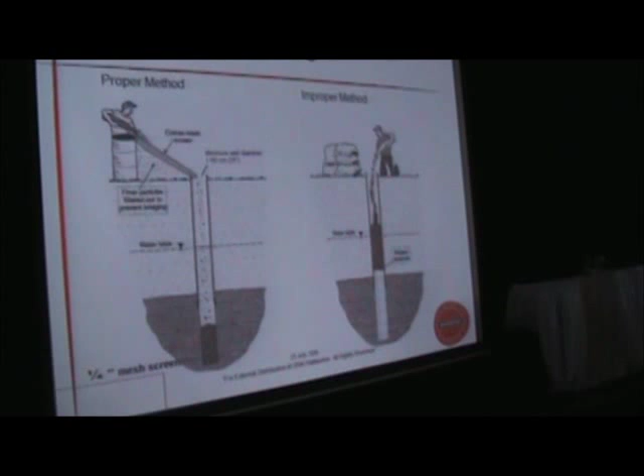Testing water: the big thing is when you're using bentonites or cement. For bentonites, you need a pH of around 8.5 to 9. Add soda ash - pretty simple, a one hit wonder, treats it out. As soon as it hits it, the pH comes up. On the other side, you've got to take out the hardness. When you add soda ash, think of it as a teeter-totter. You've got high calcium or hardness in the water and low pH. When you add the soda ash, it precipitates out the calcium, attaches onto it, drops it out of the system, makes it inactive, and brings up the pH. It's like a teeter-totter, that's how it works.

Adjust for calcium. Be aware of temperature for cements and bentonites - warm water tends to stimulate things a little bit. If the bentonite water is really warm, like it's been sitting in the sun in a barrel, and you pour it into your tank, it speeds up your hydration. We've gone from a 7 to 9 minute working window down to probably about 4 or 5. That's the time from grabbing the bag, mixing it, pumping it down the hole, having it full, and starting the batch.

You have to keep it close - you've got 5 minutes to keep that pipe tremied along, or it's going to be fluctuating. Water has a lot to do with it. Like I said, I can't stress this enough: if you want to grout, I don't care if it's cement or bentonite, figure out your water volume, mark it on the tub or whatever you're mixing in, and build up to that level. It's so many bags of this, and down the hole it goes. If you're consistent, you'll be efficient. If you're not consistent, it's a bad day.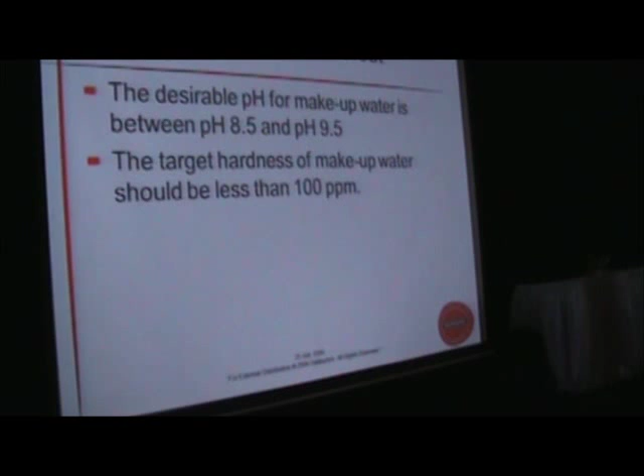It's a hardness issue - just add more soda, another coffee cupful, and you should be good to go. That'll be ample for treating 24 gallons. And it has to be sodium carbonate, not bicarbonate. You can get sodium bicarbonate anywhere - go into a farm store, they'll sell you sodium bicarbonate. But it has to be sodium carbonate. There's a difference.

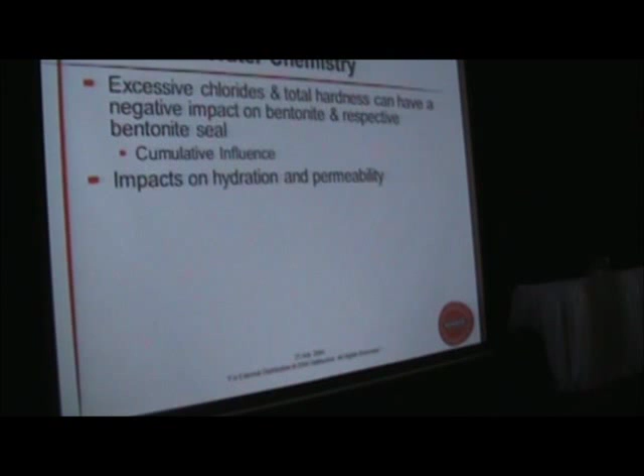Okay, water chemistry we've already gone through. Excessive chlorides - this is the one. Chlorides have a cumulative influence. In other words, there's more than one thing that happens when you have a lot of chlorides in the system.

Hydration and permeability - what it does, very basically, is once chlorides are over 1,500 concentration rate, over time the bentonite will start to break down. It starts to eat away at it and breaks it down, turns it into a powder. It dissolves it.

When you get to a hardness of over 500 - that's excessively hard water when you're dealing with bentonites or anything like that - what it winds up doing is clumping, and you'll never be able to pump it. You're wasting your time.

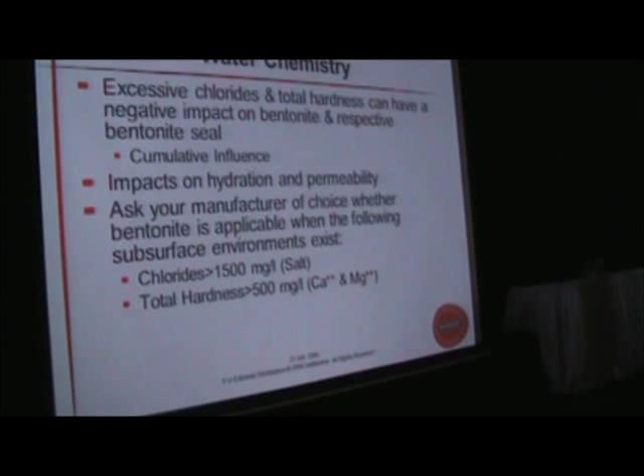In both situations, if you're dealing with that, go to a cement. If you have to seal up anything to do with chloride - different zones you've drilled through, you've got fresh water and figure you're going to go a little further, then for whatever reason you go down a bit more and hit a salt zone, or you want to isolate zones - cement them off. Don't fool with bentonite. Bentonite is what I'm involved in, but I don't care - anything to do with chlorides, go to a cement grout. If you've got to drill through a zone or want to seal a zone, seal it with cement and drill through the cement. That's the only way you can deal with chlorides.

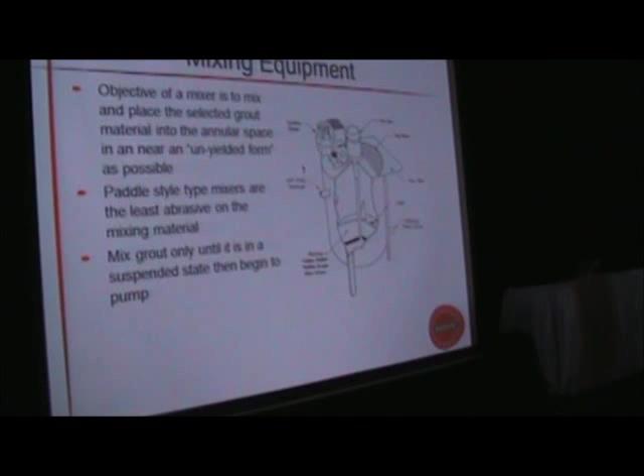Very quickly, this slide's been around for eons, but anything to do with a bentonite-based grout or mixer, you have to have paddles. Running it through the impellers of a pump just causes the bentonite particles to break up, you expose more surface area, and it flash sets on you. When you're mixing this stuff, you don't want a vortex happening like the old toilet bowl. What you want is it just moving around to the point where the whole tank is rolling, about 40 to 45 RPM.

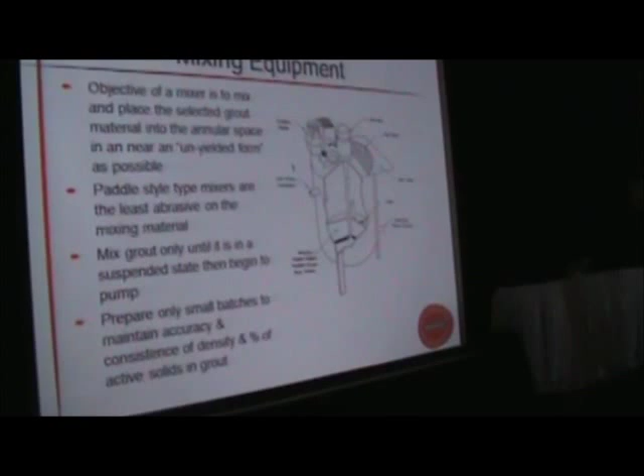The big thing is when you're pumping a grout, do not ever shut off your paddles. If it sits, it tends to go into its set, or you speed up the set process. Prepare small batches - this depends on whatever size your system is. You try to stay with batches you can handle, and be accurate with your water.

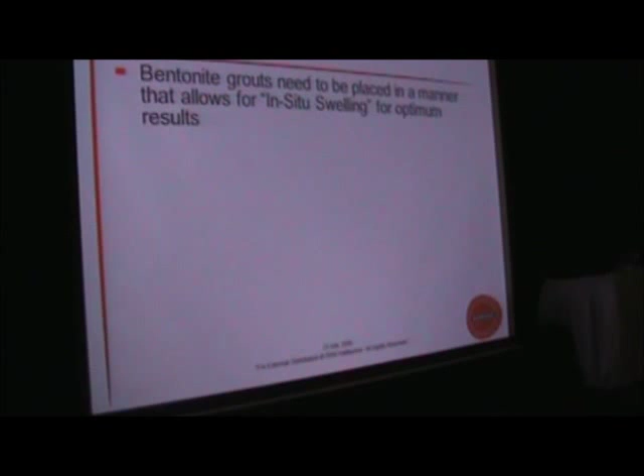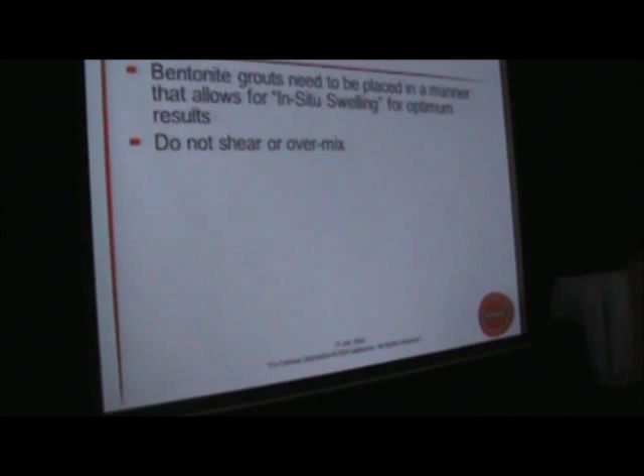Effective placement - the whole deal with bentonites, since it states very clearly you have to grout the outside of the casing from your shoe up a meter, is you've got to place it down there. Some of your wells are fairly deep around here, so you've got a long way to pump them. You want to get it down there in situ, meaning in as liquid a state as possible, so when the grout stops moving it'll start setting. You don't want it setting in your tremie line - that's a bad day. Do not shear or over-mix. Basically, when the bag is in the tank, it doesn't matter if it's a two-step EZ-MUD bentonite seal or a one-step Quik-Grout - doesn't matter what kind of grout or whose it is.

Once it's in there, usually mix them about 30 seconds. Not a minute - go for a smoke, phone whoever, play a video game, whatever you want to call it. The thing is 30 seconds, keep that impeller going, open the valve and down the hole it goes. Don't mess around.

The big thing is, when you're grouting or whatever, you want to have maximum volume and maximum flow. So the bigger the tremie line you use, the better off it's going to be. The lower your pressures are going to be, the easier it is to pump. Unless you do the old-fashioned thing and dilute it and say that's good, but we'll just work with that one.

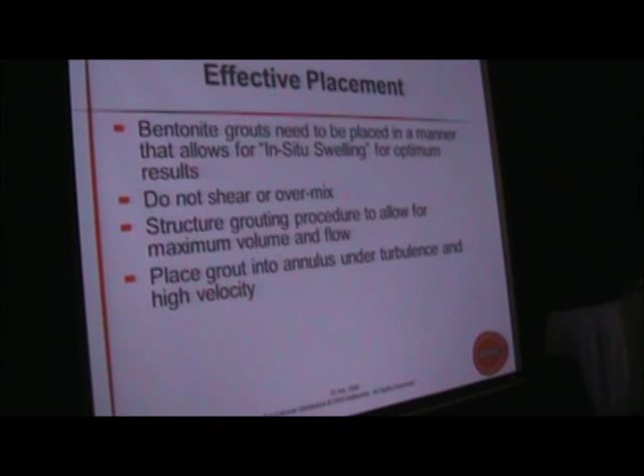Okay, place grouting in the annulus under turbulence, high velocity. The faster it goes down there, the better job you're going to do. Especially the first couple batches that go in there - they're going to be moving to surface and purge the hole. You want them in and moving so they pick up all the garbage and crap at the bottom and bring it to surface.

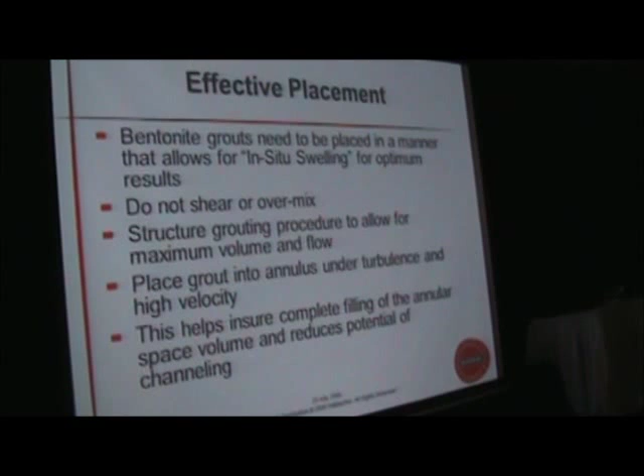Okay, that one's pretty well self-explanatory there. Safety and handling - we're on the home stretch here, guys, so everyone just pretend you're awake and do good here.

All bentonite products used in the grouting or drilling phase of a water well have handling instructions on the packaging. The big thing is it is the responsibility of the end user to be aware of the safety and handling for each product.

Anything that you use is environmentally - because you're drilling the water well, people and all that stuff - safe to handle. MSDS sheet, you have to have them now, and it doesn't matter what province you're working in, I don't care, anywhere in Canada. If there is an issue or whatever, the first thing they will ask is where your MSDS. Okay, and an MSDS has to be within, there's a date on the top, 5 years of today's date.

Anything within the 5-year window on a bentonite is a good MSDS. They're updated every 3 to 5 years, but make sure that you have a current one. That's what they'll tag you on, as an outdated MSDS.

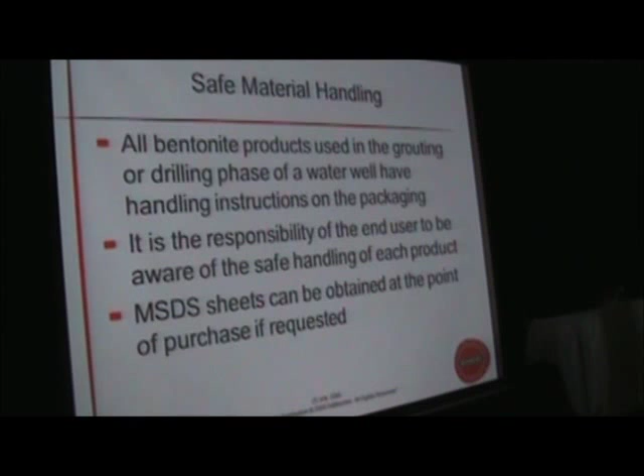Okay, now in the regulation they have this - this is one of the few regulations out there that actually specifically states NSF, meaning National Sanitation Foundation. This symbol here is the one you've got to see on anything you're using. I don't care if it's a drilling fluid, a foam, or your grout, or anything - it has to be NSF.

And what that is - this is just... pull plug, and I'm going to leave the microphone here, so work with me. All kidding aside, on the bottom of anything, generically speaking, you should see this NSF, and on the bottom here, ANSI Standard 60.

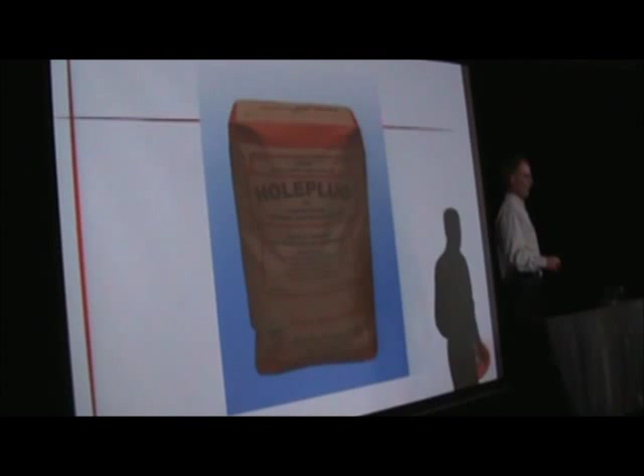And what that means - there are two different institutions that independently monitor the quality of the material to make sure that they fall within environmental compliance. If it has an NSF, ANSI Standard 60, that means it falls in the category of materials that can be used in potable water situations without creating any toxic residues harmful to man.

If you don't have that on your packaging, you don't have that on your drilling fluids that you're using, you're just hanging yourself out to dry because you've got no support whatsoever. Your regulation stipulates very, very clearly NSF, and you've got to make sure - I know all the manufacturers of the different products - there's only 2 products out there, now used in the water well industry, that are very rapidly being pulled because they don't have that certification.

And straight up, the industry is just going with, instead of the sue-me attitude, let's just do it properly. And so everything, any of your grouts, are all NSF. You want to make sure your product, whatever product of choice you're using, states NSF, ANSI Standard 60.

Now, this is a big thing when people are dealing with the public, and it's one of these catchphrases, and it's very important that you understand this. Anything that is NSF and that is classified as degradable - what that means is over a long, long period of time, 10s, 50s, whatever years depending on the product, it will break down and revert to its natural state.

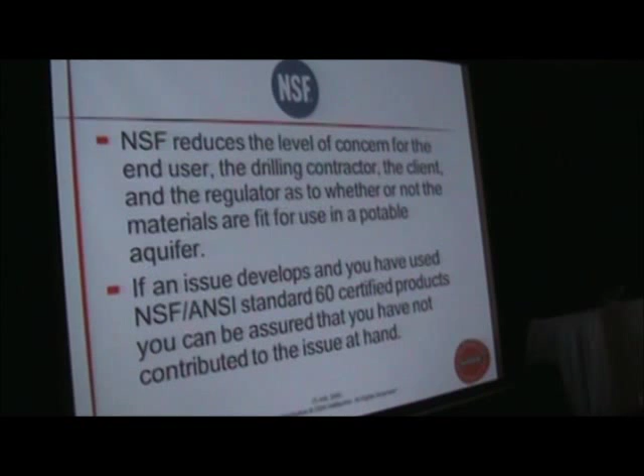Okay, what are we doing here? Right on time, we're in about 4 minutes.

Anyway, with Baroid or anything, just so you understand how this works, it's a third-party process. These people don't announce themselves, and it's worldwide, anywhere in the world. They just walk into the warehouse and say, 'See that bag up in the corner? I want the third one down on the skid. The one coming off the conveyor, I want that one the guy's got in his hand, and I want those four skids off that truck being delivered.'

If you have any questions or an environmental issue comes up, you phone the manufacturer, and it's up to them to step in and help you out. Any questions?